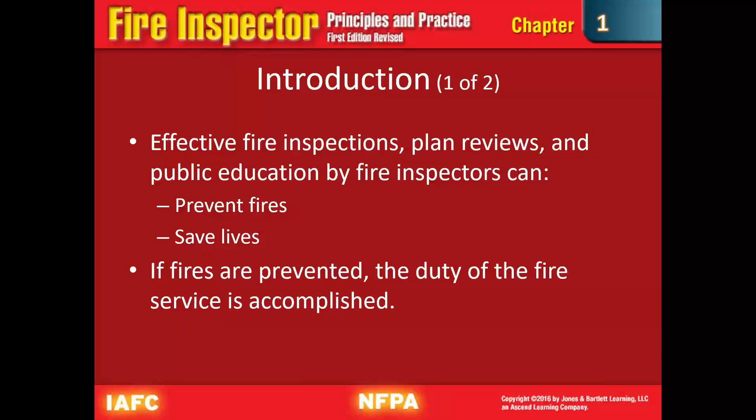It kind of goes back to an old adage from Ben Franklin that I always like to share with people, that an ounce of prevention is worth more than a pound of cure. So if we can prevent these fires from happening, we can prevent these bad things from going on, then we're not risking the lives of the citizens and the lives of our guys, and we can make everything a little bit safer for everybody, all the patrons of these different commercial businesses and all that.

The fire inspection unit may be part of a fire department or an independent unit. You'll have fire protection engineers that are typically the ones contracted to build a fire suppression system, or have some type of guidelines, or they may calculate fire flow and things like that for these different businesses, and help keep the underwriters happy.

You may have insurance inspectors that come out and inspect different buildings within your jurisdiction, and that's on the same lines, to keep their underwriters happy.

Now, I think most everybody here is part of either a fire department or governmental entity. It's like my position - I'm the fire marshal for Pearl River County, Mississippi, and my inspection authority goes through the building department, through the government agency itself. I'm not part of any fire department as part of my job, but that differs in different organizations and agencies.

It has the three E's of fire prevention: engineering, educating, and enforcing. So it's kind of working on what works, and we'll get into these different tests and programs that develop codes and standards to maintain that level of safety, educating the public - not only kids during fire prevention week, but you may take a few minutes to educate somebody as to why this is safe in their business. And also the enforcement aspect of it is when they don't...

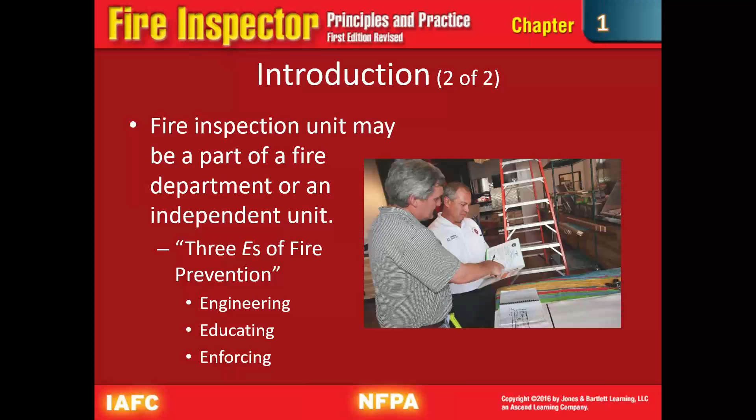So the question is, what is a fire inspection? It's a visual inspection of a building and its property.

We'll talk about a few other things like property maintenance that has a big influence on fire safety. We want to determine if a building complies with the statutes and regulations.

We want to reduce risks of fire and maintain its level of protection that's required for its occupancy.

Going back to that on the previous slide, believe me, there's a lot of companies and businesses and buildings that will, if you let them get away with things, they will. So that's why we're here, that's why we go out and inspect these properties.

Inspections are conducted at businesses, apartment buildings, schools, hospitals, places of public assembly, and other occupancies, except 1 and 2 family dwellings. A residential property that's a 1 or 2 family dwelling is typically not going to be regulated in most areas.

The plans for it may be reviewed, but typically we're not going to schedule regular inspections in those.

But going back to it, like schools, I know in Mississippi all of your daycares require annual inspections by the state.

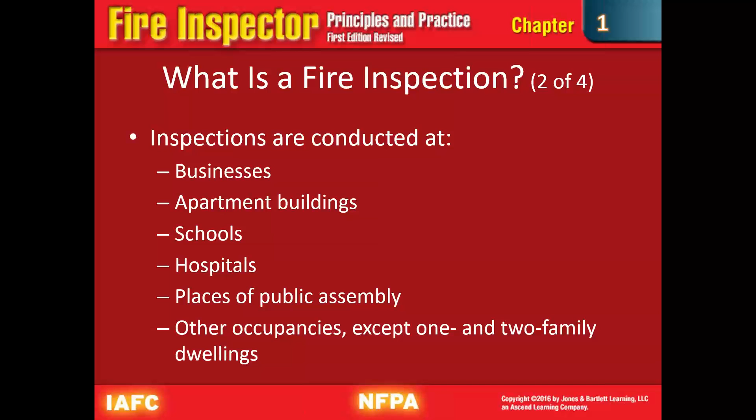Hospitals, 2 inspections a year, and those are your organizations that typically require state licensing. So those are pretty good about following directions on fire inspections and things like that.

During an inspection, we want to test the suppression and fire alarm detection system. Now, the way that we're going to check that, we may not necessarily go and conduct the test fully, but...

We're going to make sure that they are paying their independent inspector to come out and check the system. If it's like an Ansul system, they're going to check and make sure the propellant is proper.

And the extinguishing agent is proper and everything's charged, ready to go, and they'll tag it, and that's that form of inspecting it. Also with the fire alarm system, certain systems you can check to make sure they're operating properly.

Occupant evacuation drills, we're going to see a lot of that in schools.

A lot of other businesses may be required to have an evacuation drill posted, but it may be in the safety plan that is issued out to employees and things like that.

We want to evaluate the fire retardancy quality of a certain building. Kind of getting a little farther ahead, but you start dealing with buildings where you're doing a lot of giving.

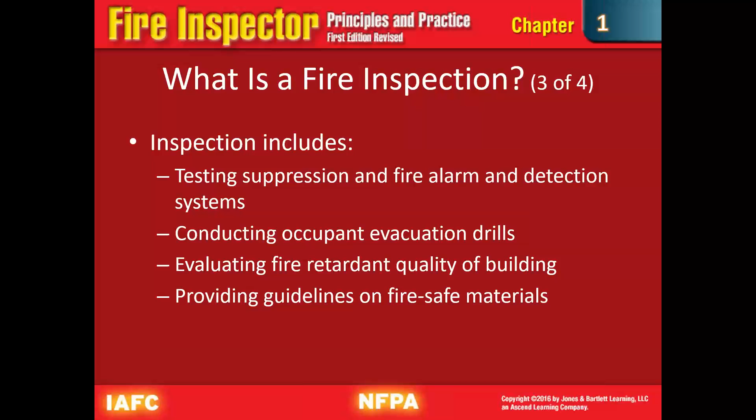Well, with that give us some take, and you may have to look at getting a variance passed for a certain building that you're really going to inspect, to look at where they're doing better on the safety side, to where you may be able to be a little bit lax on another aspect of it. And then providing guidelines on fire safe materials.

Now, your general fire safety or process inspections, we're going to look for any type of overcrowding, like in your assembly buildings, gyms, town halls, any type of event halls and stuff like that.

Blocked exits. A lot of times you may see in a mercantile business that they'll have stuff just stacked up, or...

We used to get complaints a lot from a local store that they would store things down the aisles, and the concern was that people weren't able to reach the exit, or they'd block a rear exit door.

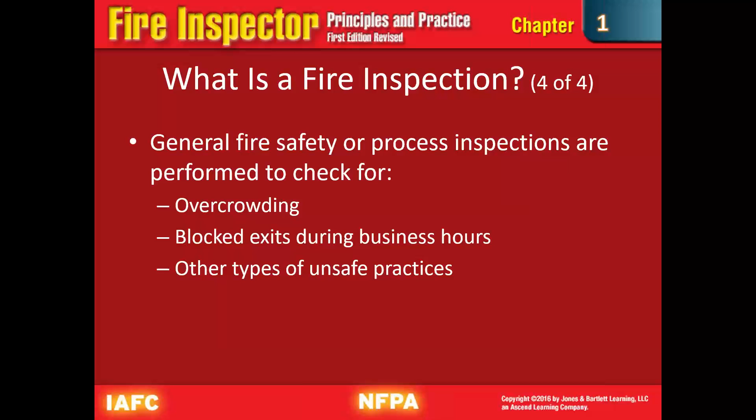There's also other types of unsafe practices that we may find while we're doing these inspections, and we can bring that to their attention.

Fire inspectors may work in the fire department, an independent code enforcement agency, or a business that performs fire inspections as a contracted service. I discussed a little bit about that earlier. Local government determines where and who performs the inspections.

And that's really important. We'll get more into the administrative and legal aspects of it. I believe there's actually a legal aspects chapter, and you definitely want that to be on the minutes of your entity's meetings, showing where you were hired and approved.

If you are the fire inspector or the fire marshal, that's part of your job title, so that whenever you're going and doing these inspections and this code enforcement kind of work, you're backed by your agency.

Fire inspectors that work within fire departments may assume other positions: fire marshal, fire investigator, fire and life safety education specialist, and fire protection engineer. Most places, especially here in the southeast region of the United States, we're going to see that one person is pretty much everything, and they do everything.

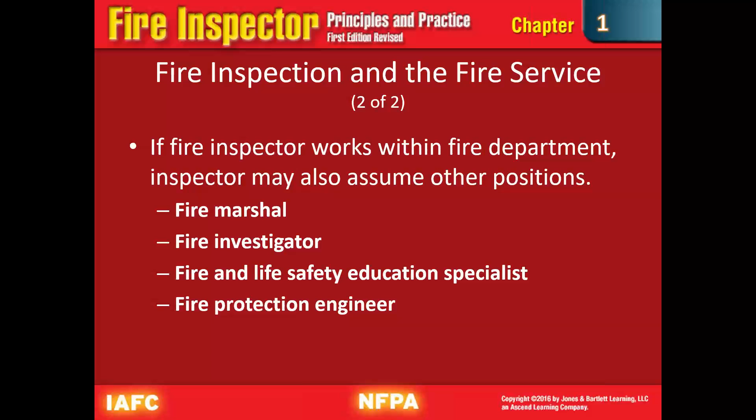Now, I've kind of gone over everything, and I don't agree with some of it, but it just is what it is. This is the information to know for the tests coming up.

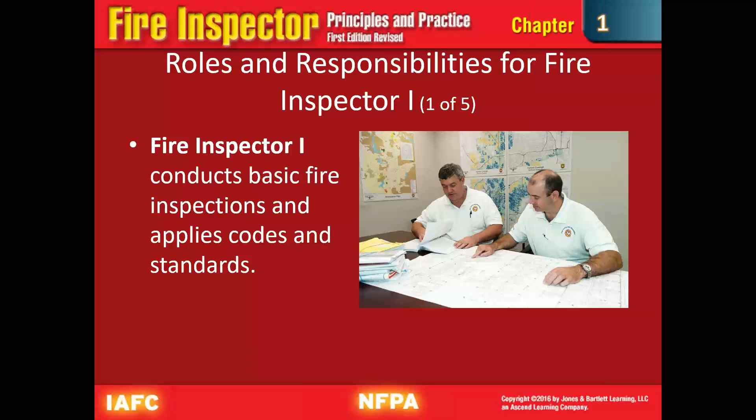All right, your roles and responsibilities for the fire inspector, and they're really breaking down the Inspector 1 and 2 aspects of it. The Inspector 1 is going to conduct your basic fire inspections and apply codes and standards, like a daycare inspection or a new commercial property inspection, something pretty simple.

The job performance requirements of an Inspector 1 are things we'll see again. I know they really harp on everybody knowing what your responsibilities and abilities are. But inspecting your structures and writing reports is very important. There's actually a whole chapter just on report writing, which we'll go over in the next few days.

Identify the need for a permit and how to obtain it. Recognize the need for a plan review. Investigate common complaints. Identify codes and standards being violated. And participate in legal proceedings.

That may not necessarily be court, depending on how your agency, department, and municipality or government agency is set up to run. Your board of supervisors, city council, city aldermanship, they may be the appeal process.

If somebody doesn't agree with part of the code that you've tried to help them with, you may have to go testify before your government board to justify what you found, how it violates the adopted ordinance or code, and what impacts that it plays. So that's a really important part.

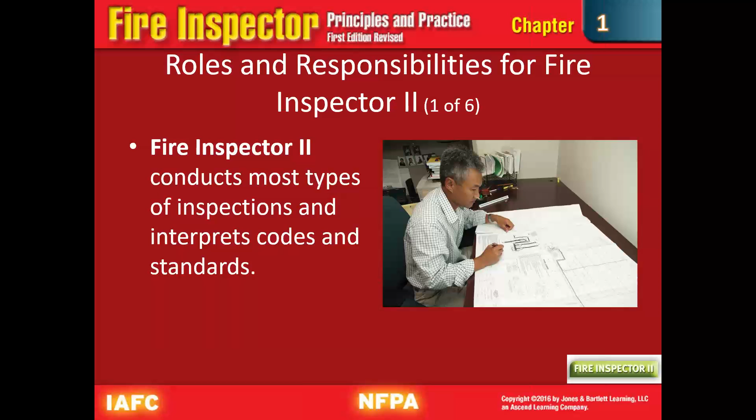They conduct most types of inspections and interpret codes and standards, and that's a big change to notice. Inspector 1 is going to follow the code, but Inspector 2 is going to interpret it - what is the intent of the code and how does it apply in this specific situation?

The job performance requirements for an Inspector 2 include processing permit applications, processing plan review applications, and investigating complex complaints.

I recommend modifications to codes and standards. Maybe something in the code is up for readoption or adopting a new code set, and you may not like what's in the code - it may not work for your specific area. That's where you can do your own research and figure out what's going to work for you.

We want to recommend policies and procedures for inspection services. If you see an unsafe practice, you can say, hey, why do you do it like this? I think it may be a little bit safer if you do it like that.

Also to compute the maximum allowable occupant load in a multi-use building. A few little differences can make a big difference as far as your occupancy load. This person is going to have a little bit more knowledge and ability to deal with figuring the occupancy for more complex problems, ones that have more variables.

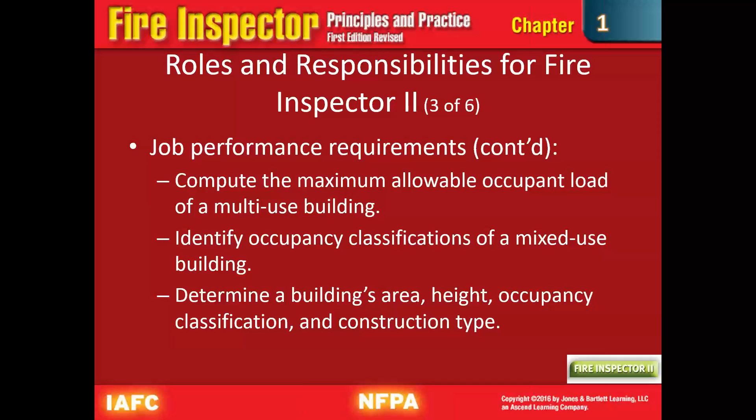Also to evaluate fire protection systems and equipment, analyze the elements of exits in a building, evaluate hazardous conditions, emergency planning procedures, and verify code compliance for hazardous materials and flammable and combustible liquids and gases. I think everybody has some form of LP gas or some type of hazardous operation or material that comes through their area, and it's really important to make sure these are being handled and stored properly.

We'll look at fire growth potential and inspect emergency access for the fire department. Again, it's kind of redundant from the Inspector 1 level, but it's also for all fire inspectors - make sure the fire department can get there and put in an effective attack.

Verify compliance with construction documents and ensure that life safety systems are installed, inspected, and tested. What does that mean with compliance with construction documents? Typically in a large scale commercial project, you're going to have the plans that have been reviewed, and then you'll have what was actually built. When they get into the process, they may find there's an issue where they're not able to comply or build it as it was engineered, and they may have some type of change on the fly and a different change order put in.

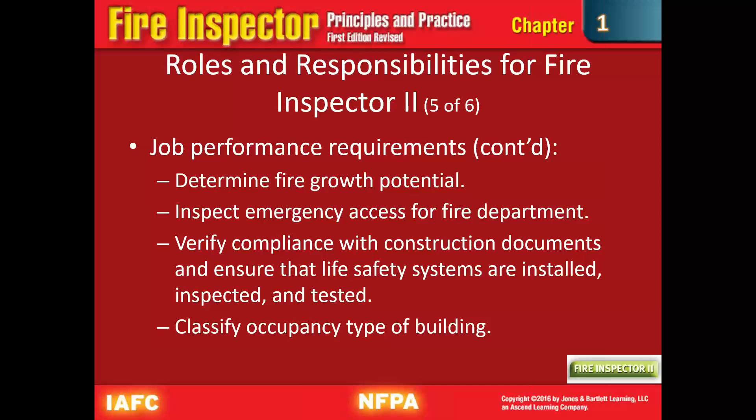Being able to compute the maximum allowable occupant load, again reviewing the proposed installation of fire protection systems - it's kind of calculating fire flow and things like that.

Verify the means of egress elements are provided and meet codes and standards - that's the size of the door, anything that prohibits the door from opening properly, so on and so forth, and we'll get into that for sure. Also verify the construction type of building based on the set of approved plans and specs, which we kind of already spoke on.

All right, so we're going to talk about codes and standards, and they provide us guidance for the construction and use of buildings. So our code is going to be a rule or law enforcing a fire protection, life safety, building construction, or property maintenance issue.

So our code is going to be what's adopted. In most places, whenever they adopt a code, it is law, it's an ordinance, and with that there's an enforcement ability with that code. A city may have a citation for a fire code violation that is just a violation of a city ordinance. You may have some states where there's actually a state statute regarding that, where a law enforcement officer with the ability to swear affidavits can either place a person under arrest or write a citation.

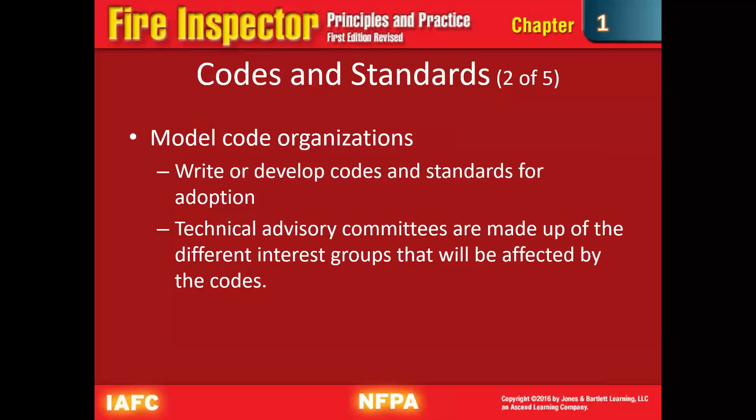You have your technical advisory committees made up of different interest groups affected by the codes - again, that's the same thing where you'll have your firefighters, construction workers, engineers, everybody at the table talking about their interests and what area they represent. The goal is to work together and come to something everybody can agree to. I've always said if you had a building built by a fire prevention guy or a fire inspector, it would cost too much and you couldn't live in it.

So we have to have that happy medium. All right, prescriptive code - we're going to list specific details an installation or construction must meet. The building code, and fire code and building code go hand in hand - you really have to be familiar with both. They do leave a little bit of gray area for inspectors to make little variances here and there, but for the most part they're going to be pretty strict on the type of material used and how it's put together.

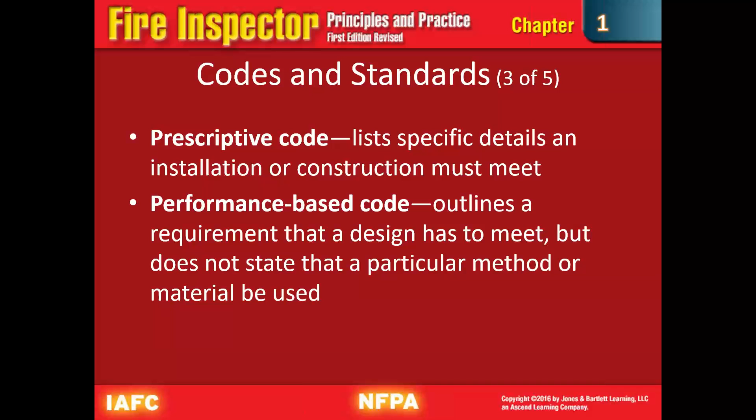Your performance-based codes outline the requirements a design has to meet, but typically don't list the particular method or material that has to be used. For example, take exit signs - if you look at earlier code sets, it gives you a certain lumen level, and says it has to be a certain type of bulb and battery backup and so on. As technology has developed, you may have some type of luminescent glow-in-the-dark option that gives off the same exact level of brightness, but it's not covered in the code book because it's not a lighted fixture with a bulb and battery backup, even though it probably performs better. That's where your performance-based code comes in - it doesn't matter what you do as long as it meets this level of safety, this level of performance, it's going to work.

All right, the adoption process.

All right, when a new code is created - say one of the things that we're working on, COVID's kind of knocked us back as far as in our area, is adopting a new code set. As things update - society, different changes in society, construction methods, environment, and stuff like that - we want those codes to reflect that.

So as codes are updated... we may find some things that work for us better, things that don't really work all that well. It kind of goes back to, would a construction feature for snow load really affect people in South Mississippi, South Louisiana? May not.

But the proposed language is prepared, and that's typically working with whatever legal counsel your agency uses to keep everybody happy. You may have a code specific to your area because of whatever issue has come up that required that - say your department has had an issue with building collapse, and they want to prevent that from ever happening again. All new construction needs to be built - instead of having 2x6 floor joists, we want to see 2x8s or whatever.

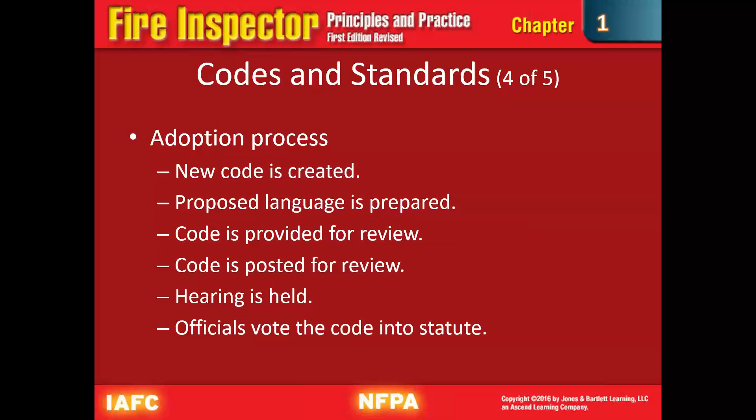Once everybody's happy, it kind of gets posted. Have public input - what does the public feel about this? It's going to make the construction of a house go up $800. People may lose their minds over that. So you never know. A public hearing is held where the actual government entity - your board of supervisors, your aldermen, your council - can hear concerns from the public, and then they vote to make the code an ordinance and put it enforceable.

All right, and we talked about that. The codes and standards are adopted under most of the state laws and local ordinances.

Now, understanding the legal processes - and I mentioned this a little bit before - the legal authority for the fire inspector varies by state and often within a state. The authority for my level of job here is completely different from maybe the level of authority of a fire department fire inspector or municipal inspector or something like that.

And it's also kind of according to the situation. Whenever I was working for the city of Poplarville, I'm also a certified police officer. I have the legal authority - I was commissioned by the city police department, and if I needed to write a citation, I could. But that authority, that line of authority, is already established.

And typically it's going to be included in the job description. It should be included in the job description, just so that you don't have somebody doing more than what's wanted.

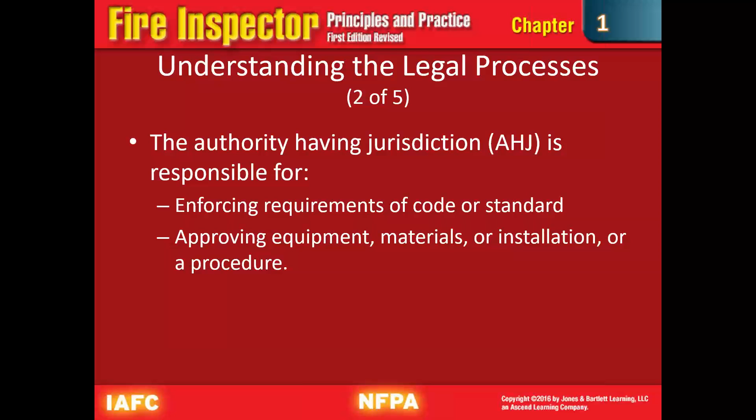The authority having jurisdiction is responsible for enforcement of the codes and standards and the enforcement requirements - approving equipment, materials, and installation or procedure. All right, and it's also in the very front of code books where it talks about the administrative section, the authority having jurisdiction, and whose responsibility it is. You get a chance to read into that, and that's something I believe would be an assignment to read over the administrative section.

All right, your state and local law affects every aspect of your job, and that is very, very true. You may have specific requirements that every written notice must follow. The range of authority is defined by your state and local law. It may cover your types of property, sizes, and the type of inspections that you're able to do.

For instance, in Mississippi - just for an example, something I get a phone call about all the time, drives me crazy sometimes - we're part of the Mississippi Insurance Wind Pool in South Mississippi. All mobile homes have to be inspected by the Mississippi State Fire Marshal's Office. Now, I am duly certified, appointed, and all this - fire marshal for the county - but I don't have that authority. I don't want that authority. Poor guys with the state, that's kind of something they got put into their area of operations.

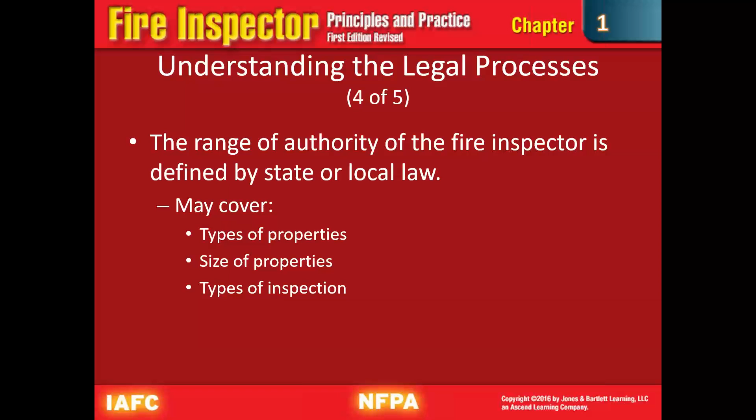But this is kind of an example because they needed somebody to inspect it and to ensure those properties - they have mobile home inspectors. And you may have something similar, but for different means. So be aware of that and where you fall in that. You may be involved in legal proceedings, criminal or civil, according to how your agency wants you to be involved.

You get into court, any decent defense attorney is going to attack your training, your expertise, your procedures, your guidelines, everything, and certifications. So your documentation of your training and of your credentials is going to be important, and then your policies and whether you're following those policies, documenting everything really comes into play and really helps out.

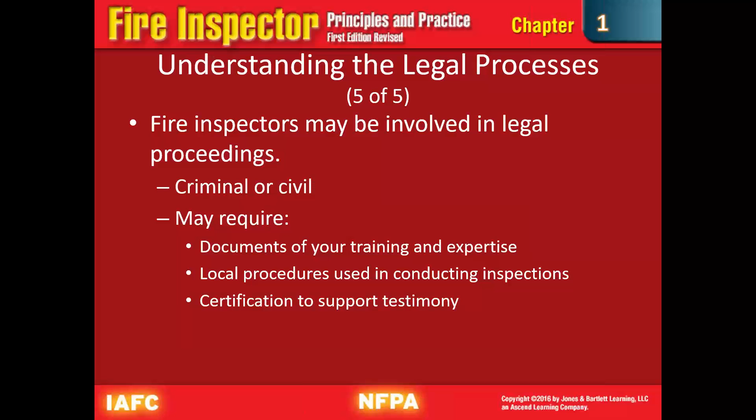A permit is a document stating compliance with or restrictions for the use based upon the applicable codes. Some places are different - you hear either a CO or a certificate of occupancy, another term for your use and occupancy permit. You may have a special use permit for an event, and that event could be held either in a public place, or you may have a certain type of event where areas are cordoned off and things like that.

Your fire protection equipment permit - say your sprinkler, or maybe you have a warehouse, like some type of commercial warehouse where they use a deluge system, you may have to have a special permit for that, for the amount of water and runoff and so on and so forth. Hazardous materials use permit, like LP gas places, any other type of material processing plants, so on and so forth.

Just a few examples. You may also have hot work permits if you have a manufacturing facility, and your agency can require a permit or a hot work permit to be pulled whenever there's any type of welding or cutting on metal or something that has a higher than average percentage of having a fire hazard develop from it.

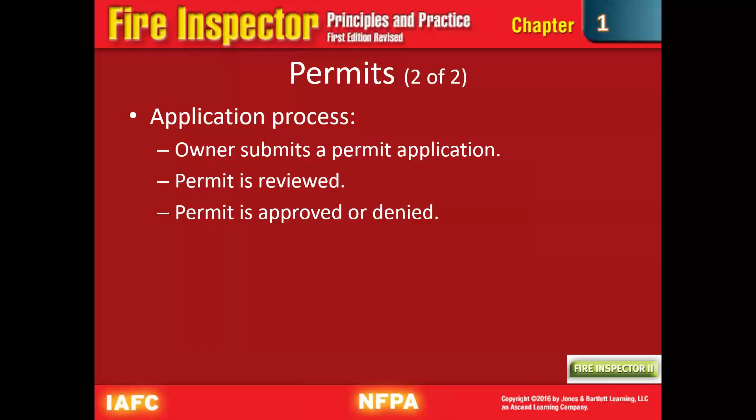All right, ethics and the fire inspector - this is one that's really big. Hold on guys, we're getting to the end of it, so just bear with me. The fire inspector must not be influenced by business or political interests. And there's the fine line - my little soapbox.

It's hard to be an inspector and not have that in mind, especially those who work in municipalities where you may have a friend of the mayor wanting to do this or wanting to do that. I'm not saying to be pressured - definitely don't be pressured, and don't be influenced or coerced or forced into something. If it's something that you absolutely feel is not safe, stick to your guns.

I've known some of my friends in fire prevention that were expected to sign off on something that was not safe, and they told the mayor or the alderman or the councilor or whoever the governing body was, okay, well you sign it, you sign off on it, and if something happens, you're responsible for it. But that's one of the things you're going to deal with.

If you get in, especially if you are the fire inspector or the fire code official for a jurisdiction, you're going to deal with these places that are wanting to put in a multi-million-dollar facility in your area and tell you, well, if you don't agree with this, then we're just going to go down the road. Most of the time, no, that's not the case. But it's also part of your job to find if a variance - and that's a big if - a proper variance can be made if there's a certain issue, that's something you can work with.

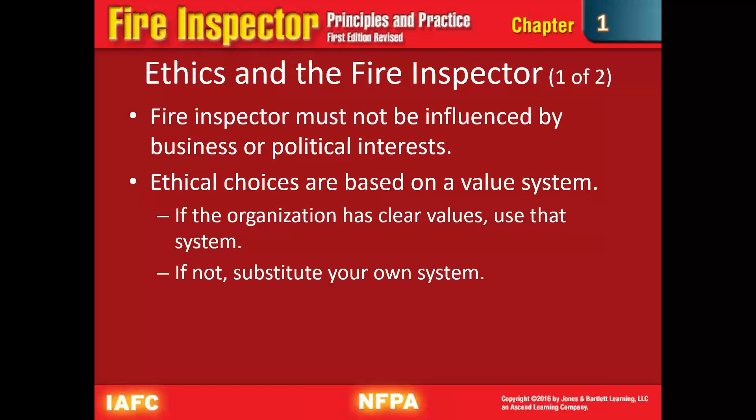It says in the administrative section of the code book in the IFC that you're not held liable, paraphrasing here, as long as you're acting in good faith. Well, you can still be held liable. Civil liability is something that doesn't stop. But if it doesn't look right, doesn't feel right, you either work to find a variance or deny it and do what you got to do.

Clear organizational values can stem from having a code of ethics that's well known. You may have to, especially if you're taking over in an area—and I've heard of this happening—deal with a previous inspector who did fire inspections from the driver's seat of their car. There's no way you can do that. But if you go in there and say, no, this is the right way, this is the way it's going to be done, they're going to know: don't mess with this guy, don't try to play games with him because he's serious, or she. Selecting employees that share those values is especially important if you're in charge of a fire prevention division or bureau. You want to make sure that anybody you bring in shares those same values and is going to do the right thing.

Ensuring that management exhibits ethical behavior—that's the thing. If you're the guy in charge, you need to be the one showing everybody else how to be. Have clear job goals, don't try to obscure them. Have performance appraisals, that's where you get assessed and also assess your people to make sure everybody's doing their job properly. And then implement an ethics training program. Sometimes we need to be reminded. Some people may not see it as you see it—you may see a big ethical issue whereas others necessarily may not.

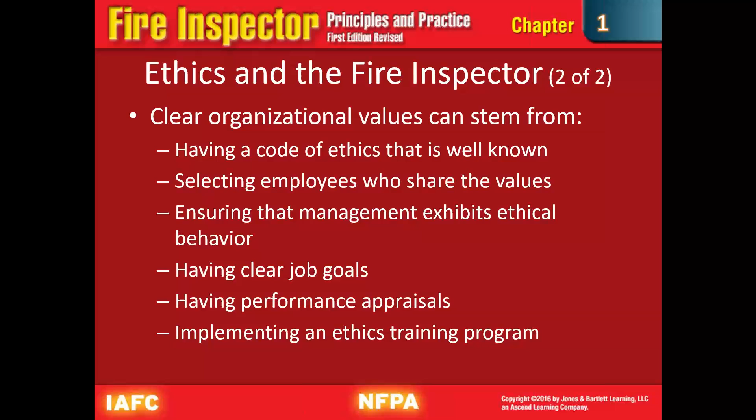In part of your career, you should always develop these skills. If you put down fire inspector and don't do anything with it, don't look into books, don't keep up with different changes, it's going to leave you. So you want to continually develop your professional skills and knowledge. Go to conferences, go read up. The IFC has different books that talk about how codes have changed over the years. They have a little supplemental information that's really important, and it's good to have that knowledge, especially if you're going to be working on creating new codes and adopting codes for your area. Then also professional organizations and state agencies offer continuing education and professional credentialing. I know Mississippi has an association of fire inspectors, and there are international groups and stuff like that too that offer those.

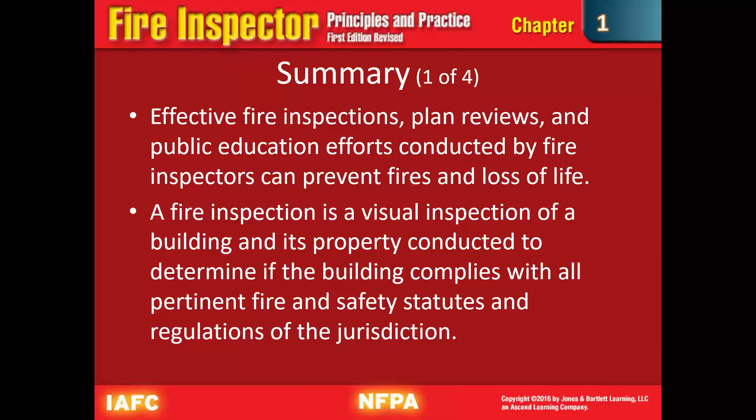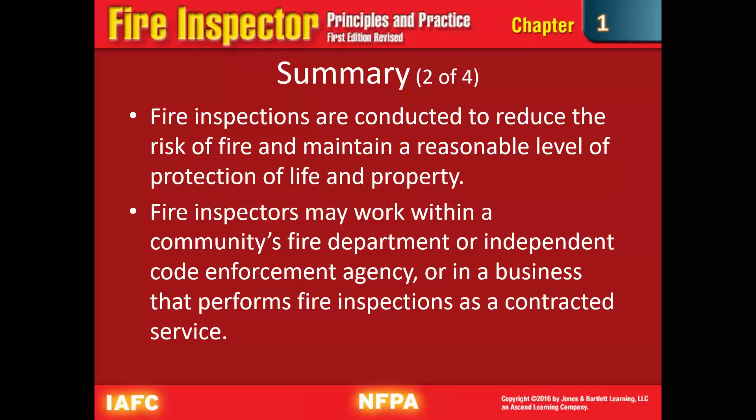So in summary, real quick: effective fire inspections, plan reviews, and public education efforts conducted by fire inspectors can prevent fires and loss of life, and save property. A fire inspection is a visual inspection of a building and its property conducted to determine if the building complies with all pertinent fire and safety statutes and regulations of the jurisdiction. They're conducted to reduce the risk of fire and maintain a reasonable level of protection of life and property. Fire inspectors will work within a community's fire department or an independent fire code enforcement agency or business that performs fire inspections as a contracted service. Codes and standards are regulatory or industry adopted documents that provide guidance for the safe construction and use of buildings. A code is a rule or law established for the enforcement of fire protection, life safety, building construction, or property maintenance issues. A standard is a set of specs or requirements considered industry best practice that meets a minimum level of performance guidelines. The job description of the fire inspector should list the limits of legal authority and how to gain the next level of expertise. Many fire inspection activities result in the issuance of permits—you need to know how all that works.

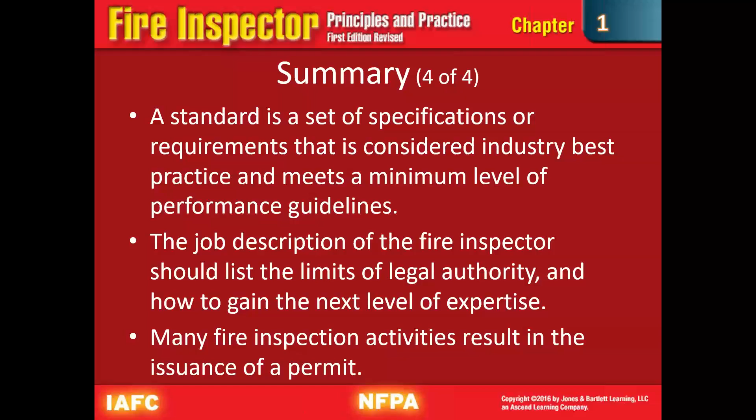So that's it for chapter 1. Remember to read the chapter. All right, we're going to get into chapter 2.

No, we're not. Go away. Let me see, I believe it is chapter 4. There we go.

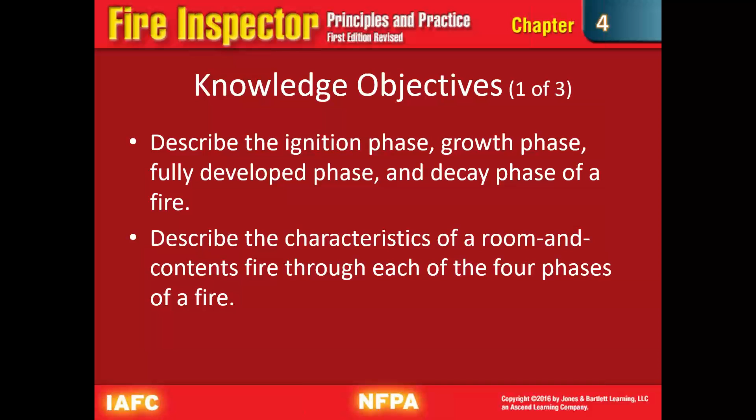We're going to describe the ignition phase, growth phase, fully developed phase, and decay phase of fire, and the characteristics of a room and contents fire through each of the four phases. We'll describe how interior finishes and decorative materials and furnishings may affect fire growth, how building construction elements may affect fire growth, and how to obtain the flame spread and smoke development rating for the contents of an occupancy.

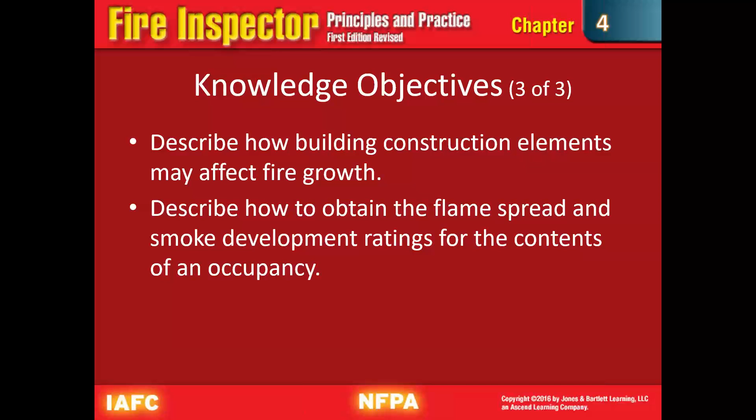One of the things I recommend is everybody look up the Underwriters Laboratories test on YouTube. It's a test of modern materials versus older materials, like natural woods, cottons, and linens. They start a fire in a room filled with older contents made of natural materials, versus newer contents with plastics and foams, and it's mind blowing. If you haven't watched it, I encourage you to, because it shows how fires spread so much quicker now, since pretty much everything in our homes is plastic, petroleum-based stuff.

So we know that a fire inspector ensures code compliance, analyzes situations, identifies adverse situations, and acts accordingly. All right, chemistry of fire.

This is kind of 1001 all over again, but we need to know these things to know how these codes are going to affect buildings. One of the very important things I've learned is that the definition of fire is very important. We talked about different legal proceedings, and you may have to stand on the stand in a courtroom and tell a jury what fire is.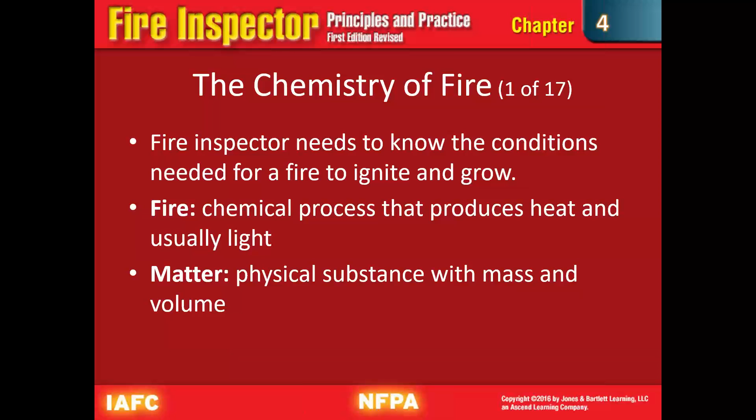Fire is the chemical process that produces heat and usually light. There's another definition that says the byproducts are smoke, heat, and light. It's really important to know that, especially when working in fire inspection or investigations, where you're really having to prove your observations.

Matter is a physical substance with mass and volume. We have our states of matter: solids that have a defined shape, liquids that assume the shape of the container and are fluid, and gases that tend to expand indefinitely.

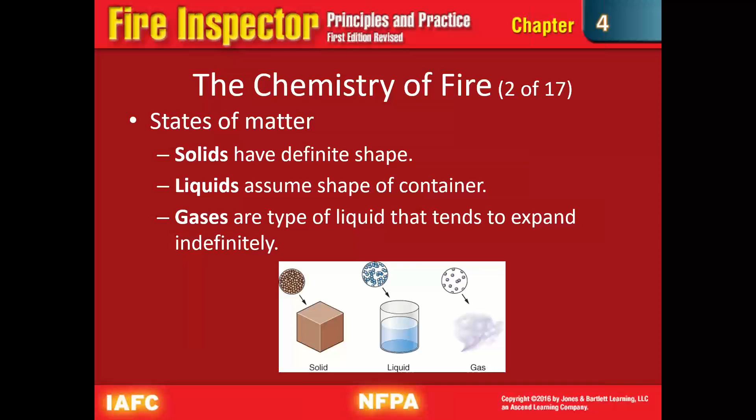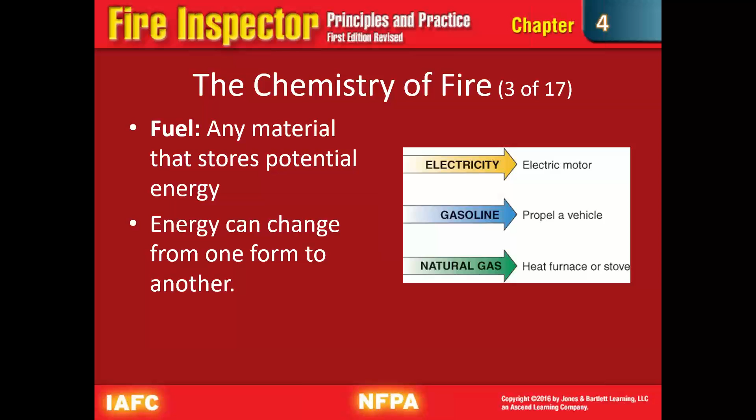You have chemical energy that's either an exothermic or endothermic reaction - exo being outside, it releases; endo being internal heat. Mechanical energy is typically friction, where it rubs together to produce heat. Electrical energy, light being thermal radiation. Nuclear, whether controlled or uncontrolled - fission, fusion, all that good fun stuff.

The conservation of energy - it cannot be created or destroyed.

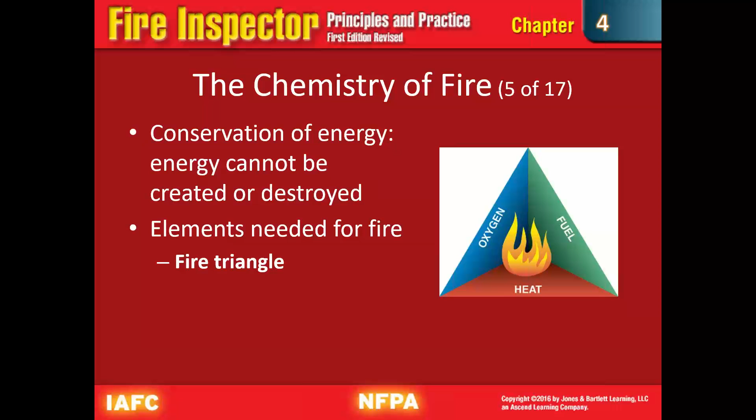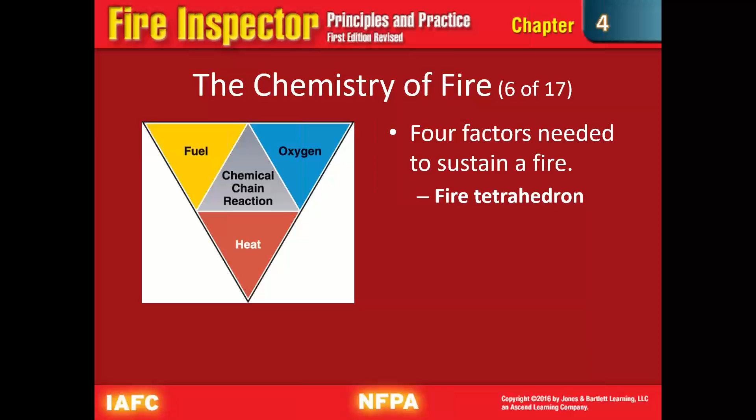Talking about the elements needed for the fire triangle - oxygen, fuel, and heat - we know that's been replaced with the fire tetrahedron. They found that you can have fuel, oxygen, and heat all together, but you have to have that chemical chain reaction to start and maintain the fire.

All right, incomplete combustion creates smoke. Guys, you have to bear with me, it's been a long day today, so we're going to get through this, and I'm trying not to mess up as much as I can.

Smoke includes the particles, vapors, and gases from incomplete combustion. They're lifted in the thermal column - remember, hot things rise, so smoke is a hot gas byproduct of fire, so it's going to rise. Partially burned particles become part of smoke, and completely burned particles become ash.

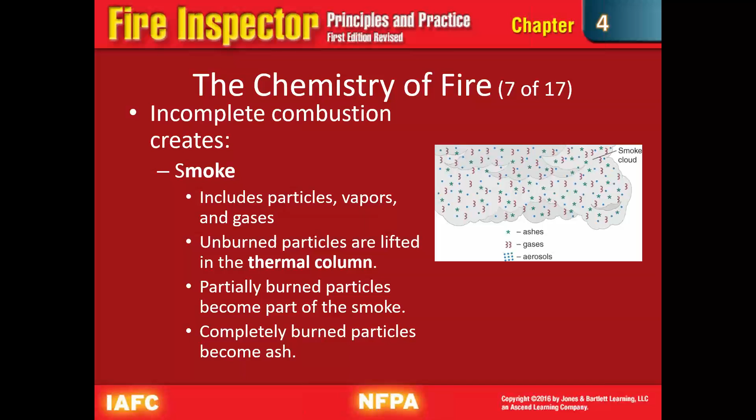From incomplete combustion we have different toxic gases - you have carbon monoxide, very important. That's becoming more and more of a thing, and a little tidbit is that carbon monoxide detectors, which were not part of the fire code, are now introduced into the fire code in certain situations, mostly residential occupancies, and specifically in dorm rooms.

Carbon dioxide's used a lot. Every fast food place, and well, pretty much every food restaurant, has a supply of it for the drinks.

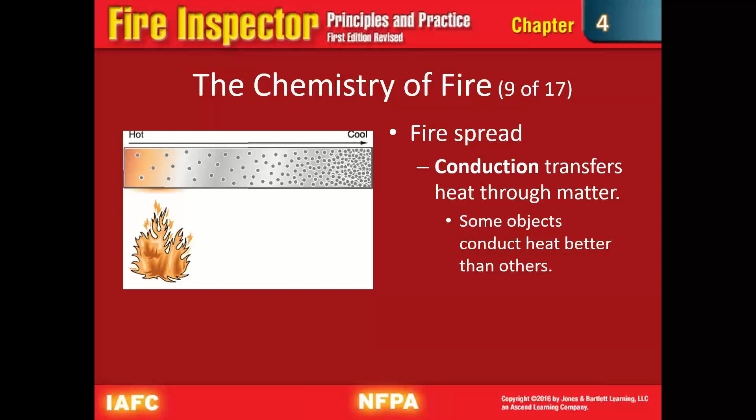All right, your heat. We know heat is hot. All right, the fire spread. You have conduction, that's transferred heat through matter. Some objects conduct heat better than others. You have metal, we know metal conducts heat very well.

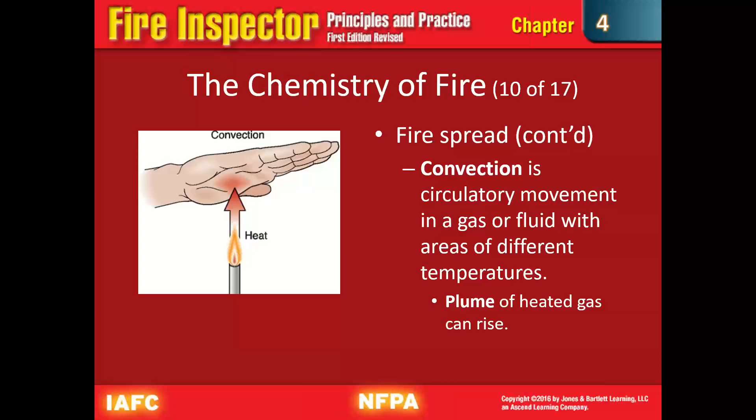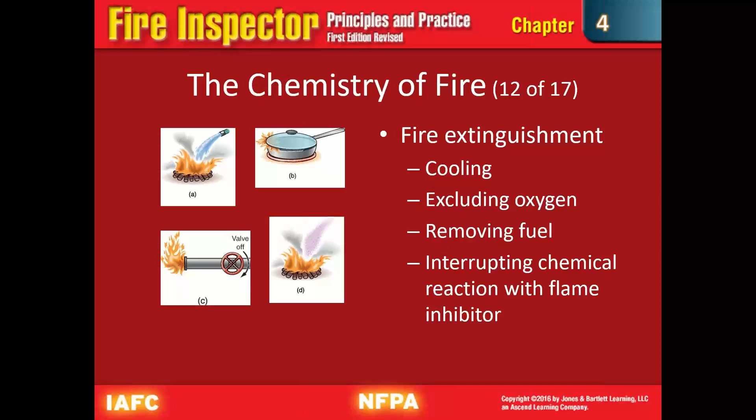So as firefighters, we know that we're going to fight fire and extinguish it by a few different methods. We can cool the fire, bringing the material below its ignition point, taking away that part of the fire tetrahedron, and it goes out. We can exclude oxygen, taking away that part, it goes out. Removing fuel, same thing. We're interrupting the chemical reaction with a flame inhibitor, which would be a kind of expensive way of putting out a fire or a campfire.

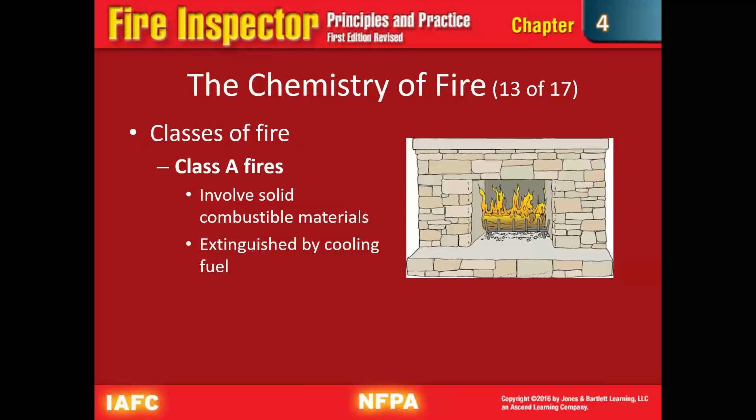All right, going over the different classes. Class A involves solid combustible materials, and we cool that down below its ignition point. Also, Class A fires, anything that leaves an ash.

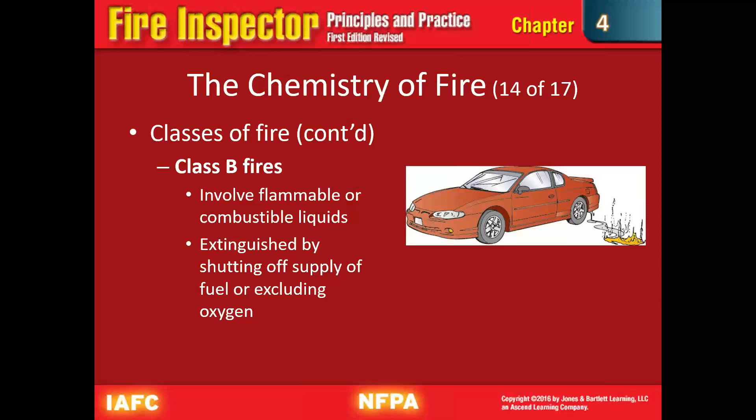All right, Class B is the flammable liquids. We can put these fires out by shutting off the supply of fuel or excluding oxygen. Also, things that come in barrels, like gasoline, oil, things of that nature.

Class C is energized electrical equipment. Once the power is cut, we can use a Class A or B fire extinguishing agent to extinguish that fire. Remember that Class C is anything that carries a circuit.

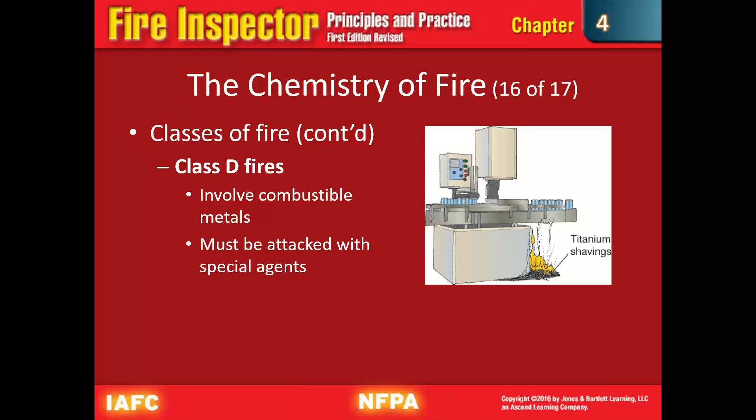Another method is passive cooling, and that way you kind of shower lightly in a mist of water onto it to passively cool the object. Now, of course, if it's a large piece of flammable metal and you put water on it, it's going to throw all kinds of sparks and become a hazard. But we can passively cool those and put them out.

Class K fires, this is something that we as inspectors are going to deal with. You will know about a commercial kitchen from the tile down to the ceiling. You will deal with this so much.

Class K extinguishers are required to put out deep fat fryers, any fires with the deep fat fryers that you see virtually everywhere, especially in southern cooking. We know that we need to have those in place, and those also are going to supplement your hood systems and your extinguishing Ansul systems and stuff like that.

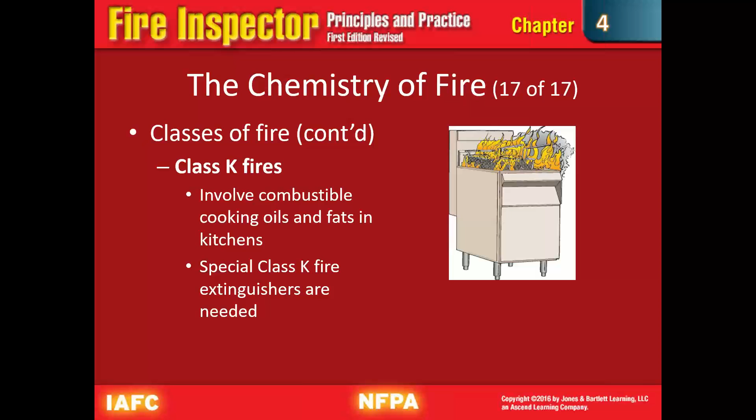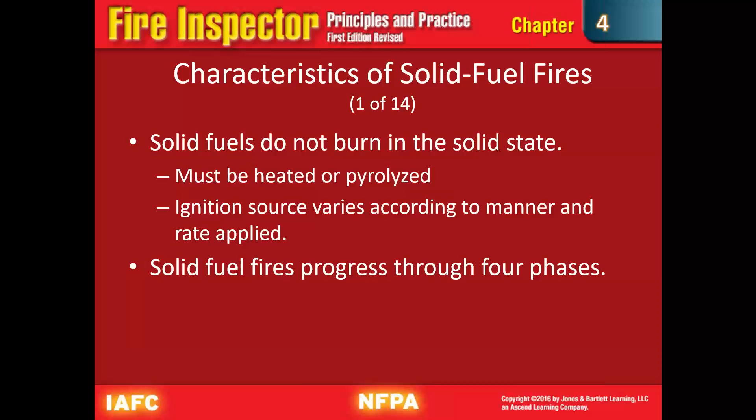Now, the solid fuel fires progress through 4 phases. All right, so we have the ignition phase, and that's typically where it's limited to your point of origin. Your growth phase, where it spreads to nearby fuel.

All right, so as the fire heats up, or as it grows and intensifies, it heats up all the surrounding materials to the point where they pyrolyze and start releasing their flammable gases until they ignite, and that further intensifies the fire and causes it to spread. Other factors like wind and ventilation play in, but we're just talking about the basics right now. The fully developed phase produces the maximum rate of burning, and that's where it's going to ignite all the available fuel.

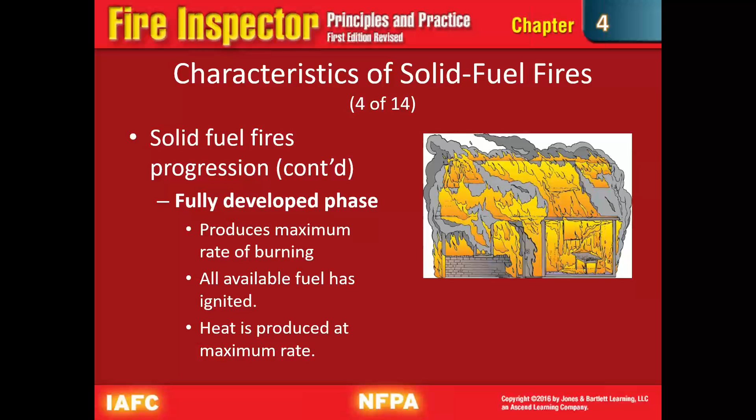The maximum heat is produced at a maximum rate. So, kind of the old timers say she's blowing and going, that's pretty much it. The decay phase is where fire runs out of fuel. The thermal radiation and hot gases decrease because there is nothing left there to burn. All your flammability is out of it. It becomes smoldering embers and then goes out.

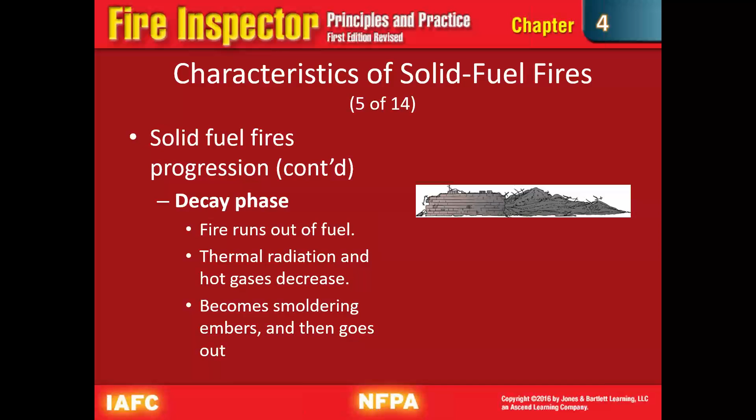There's an old time firefighter that says all fires go out eventually, one way or the other, whether the fire department goes and puts it out or not. But anyway, that's the decay phase.

So we know the principles we need to be aware of and keep in mind: hot gases and flames tend to rise. Convection is the primary factor in spreading fires upward. Downward spread occurs mainly from radiation and falling chunks of flammable material, where you'll have some drop down of material.

Then once all the fuel load is burned, it goes out because it's missing that part in the tetrahedron, and it can't continue on without something to fuel the fire.

Variations in direction of upward spread occur if air currents deflect flame. What we talked about, ventilation. It has to breathe and it has to exhaust.

Keeping that in mind, in certain construction types and construction features, it may be there to control ventilation and control flame spread. And I think we talk a lot about that in building construction.

The total material burn reflects intensity and duration of heat. All right, so it says total material, but I always would like to add the type of material. Like I mentioned before, you may have some type of petroleum-based product, plastic, foam, something like that, that's going to intensify that fire. That's going to accelerate the chemical reaction and the intensity, and make it burn hotter and faster and more quickly to ignite the rest of the ignitable material.

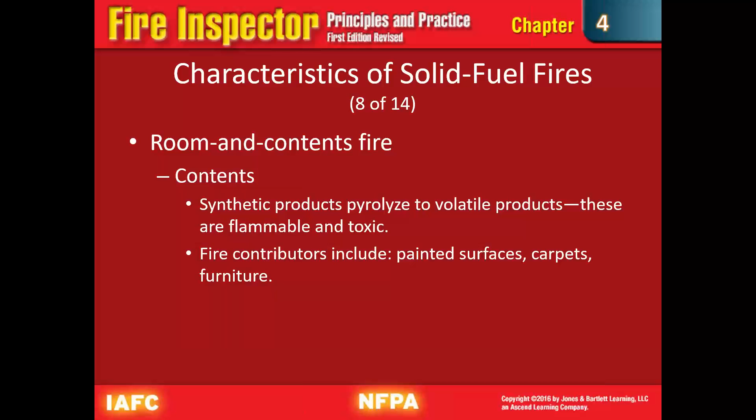An example of a room and contents fire in the ignition phase. This example shows a fallen candle ignites contents in a plastic wastebasket. Was very specific on the plastic wastebasket, but again, remember synthetic materials are going to have more of an intense fire. And the growth phase is where that additional fuel is drawn to the fire.

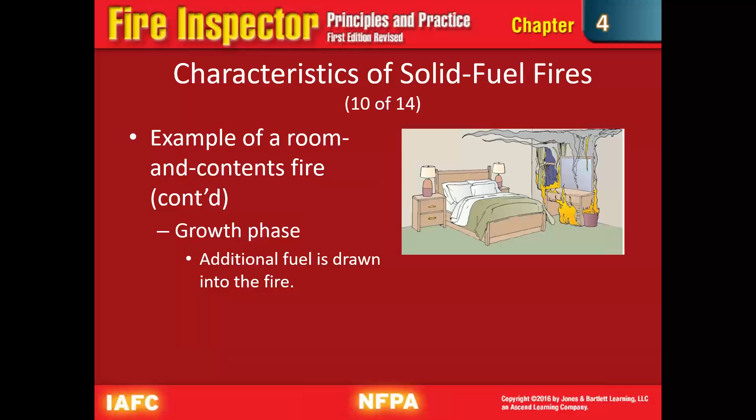I keep harping on the synthetic materials, but think about that whenever you're inspecting a building, say a mercantile or a little business that has all kinds of retail merchandise in there, and it's all plastic stuff from China. So it may be more prudent to have a higher level of fire protection in that property. But anyway, it heats the nearby material and spreads the fire.

Your fully developed phase, where at this point the heat has gone up over, it's ignited the bed and all the other areas around it, and temperatures increase to the point where the flammable materials undergo pyrolysis, and then that's the point where flashover can occur.

Now what's flashover? Anybody? Guy in the first row? All right. Flashover is where everything in the room all ignites at the same time. I know that's not the proper basic class response, but we're going to remember that's really dangerous. So I make that point again: in the fire loads you may find in these places, you're thinking of how quick are we going to go from the fire starting to flashover.

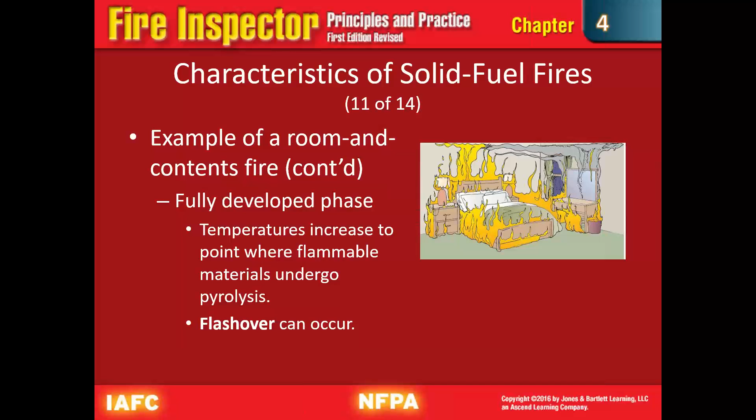Keeping that in mind, is this a significant threat to the occupancy you're inspecting, and are you making sure the proper fire protection procedures are in place? I keep thinking about our convalescent homes - they like to store up things or have excess decorations. Keeping in mind the situation, the occupancy and the residents, you may have to change that a little bit and go for a safer approach given the circumstances.

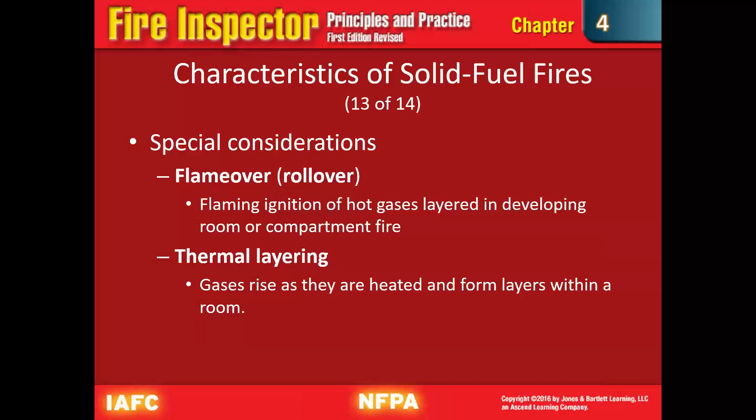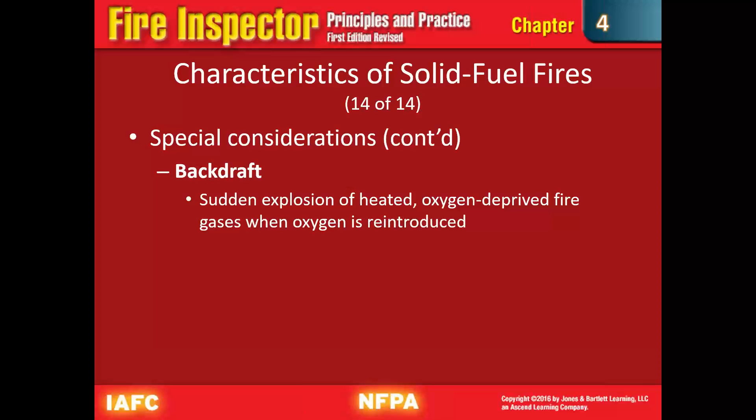Also, some special considerations: flameover, the ignition of hot gases layered in developing room and content compartment fires. Your thermal layering - gas rises with heat and forms layers within the room. Then backdraft, the sudden explosion of heated, oxygen-deprived fire gases when oxygen is reintroduced. Being aware of that definitely helps with different types of considerations for fire.

All right, the characteristics of a liquid-fueled fire is that it has to be converted to a vapor. It has to mix with air within a certain threshold to be able to ignite. The amount of liquid vaporized is related to the volatility of the liquid.

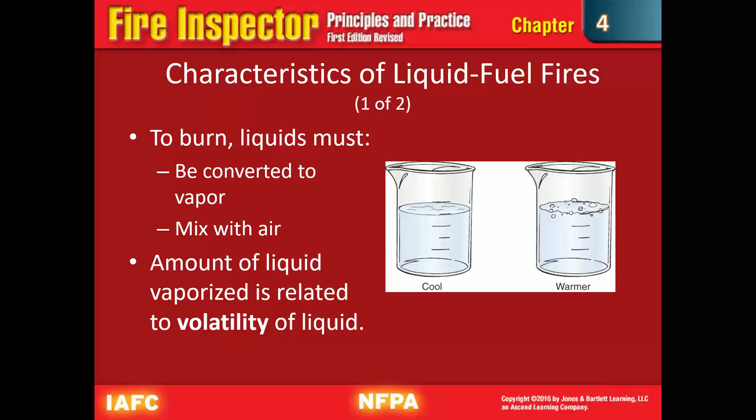So keeping that in mind, especially if you're dealing with a processing company that uses different chemicals in their processing - their flash point is the lowest temperature at which the liquid produces its flammable vapor. Your flame point, or fire point, is the lowest temperature at which the liquid produces enough vapor to sustain continuous fire.

An example of this is diesel. Imagine you have a pot, you put diesel in it, and put that on a burner. At room temperature, you can put a cigarette lighter to it and it's not going to ignite. But if you start turning on that hot plate underneath it and it starts heating up to where it starts releasing its vapor, you'll reach that flash point where you'll have little flutters and flashes. If the temperature continues to rise in the liquid, it will reach that fire point where it produces enough vapor to sustain the fire.

All right, your vapor density is the weight of the gas compared to air - is it lighter or heavier? Your flammable limits, or explosive limits, are the highest and lowest concentrations for a particular gas-and-air ratio to be ignited - your lower explosive limit and your upper explosive limit.

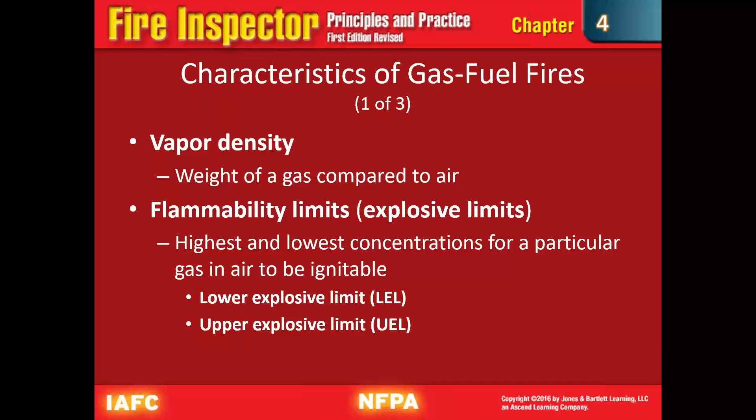Principal sources of ignition of flammable liquids include open flames, sparks, and hot surfaces. Typically your hot surfaces have to come in contact - it has to be more of a direct contact - but you may get a vapor close to a flame or a spark to easily ignite.

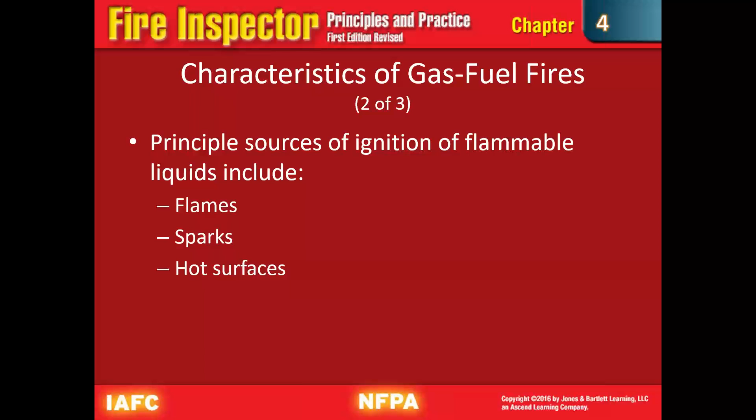And a point on hot surfaces - say you have a motorcycle, use that as an example, and you're out riding it on a long ride and some fuel splashes out of the tank, or out of a hose, or out of the carburetor, and it splashes down on the exhaust pipes, giving direct contact. It vaporizes very quickly from being heated up by the exhaust pipes, and bam, there you go. I see that in vehicle fires as well, especially with older carbureted vehicles.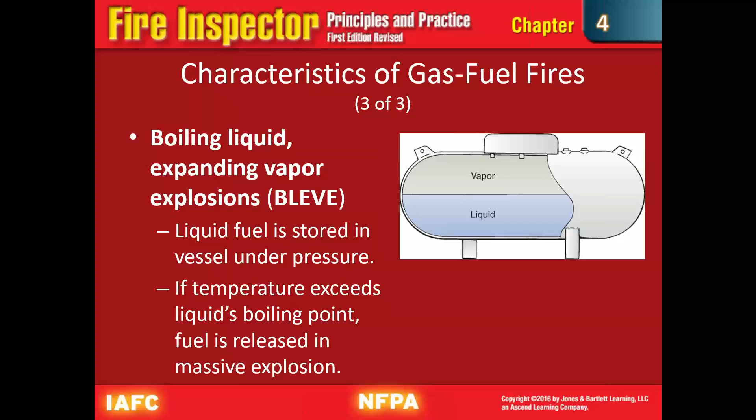Now we're going to talk about BLEVE - very important that everybody reviews this. It's the Boiling Liquid Expanding Vapor Explosion. It's where, when stored in a vessel under pressure, if the temperature exceeds the liquid's boiling point, that fuel is going to expand to the point where it ruptures its container and releases.

Fire growth is greatly influenced by building construction, referencing the Cocoanut Grove nightclub fire in Boston in 1942. That's something I'm going to try to do - reference some different case studies of where, if a modern fire inspector would have looked through there, how many lives could have been saved. But we'll talk about those later.

The fire growth can be caused by the building and its contents. It may be hidden or exposed - you may have hidden areas and void spaces in the building, especially if it's an older building that's been remodeled over the years.

Fire can also result from the furnishings, the interior finish, and the building construction elements. You may have combustible fiberboard that is part of whenever a building was first built, and they just kind of put a covering over it.

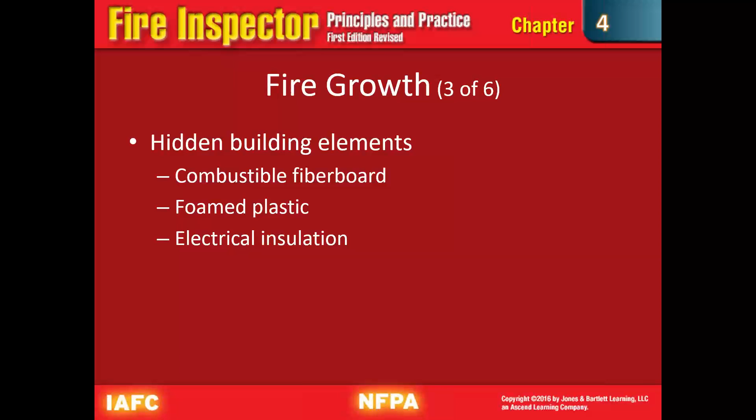Your interior finishings increase fire extension by surface flame spread, can generate smoke and toxic gases, and add fuel to the fire, as your heavy shellacs and heavy polyurethanes can also do. I know this was a concern at a certain aesthetic time period where people wanted to put carpet on the walls, and there are some types of carpeting made for wall coverings, but especially new carpets may have a certain fire resistance when laid flat, but once you put it up on a wall, it can actually be a fire hazard. Your interior finish, with those few examples, can generate more smoke and toxic gases and add fuel to the fire.

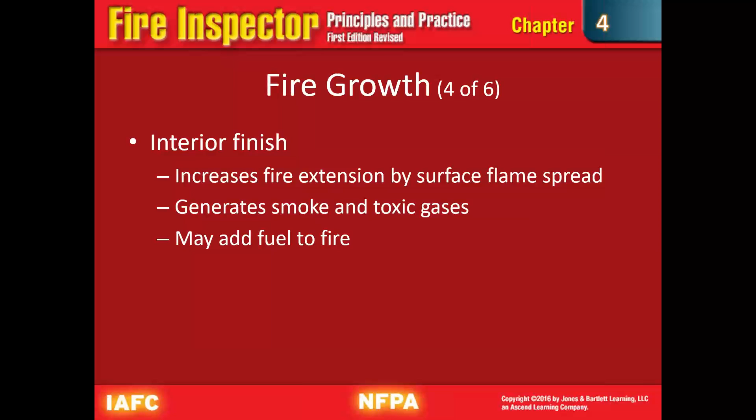Furnishings, drapes, curtains, decorations, chairs, couches, bedding, and so on, definitely can promote fire growth in a compartment fire. The potential is directly related to the construction materials. So you have things like drapes, curtains, and mini blinds, something like soft plastic that easily melts, and in a hot enough fire it easily ignites and can help with fire spread, especially if it's a low starting fire. It can run up drapes or curtains pretty easily.

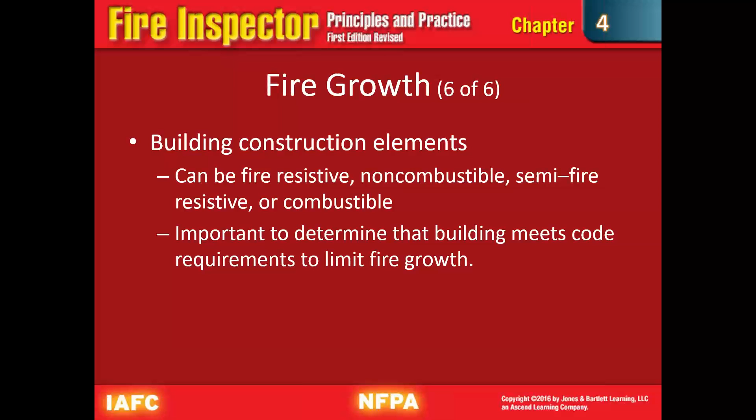Building construction elements can be fire resistive according to the occupancy and the type of building: non-combustible, semi-fire resistive, or combustible construction. You'll see your non-combustible, semi-fire resistive, and fire resistive types more in commercial buildings, and in separations between apartment buildings and things like that. But your combustible construction is going to be your stick frame houses and things like that. It's important to determine that buildings meet codes and requirements to limit that fire growth.

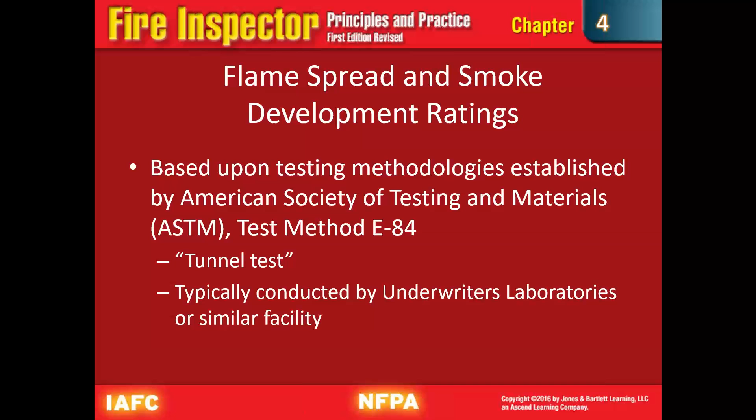Your flame spread and smoke development ratings, I kind of got ahead of myself and talked a little bit about it. This is one of those standardized testings, the American Society of Testing and Materials. We're talking about test method E-84 being a tunnel test, and it's typically conducted and they list Underwriters Laboratories, but there are several other third-party independent testing laboratories that conduct different testing on materials and practices.

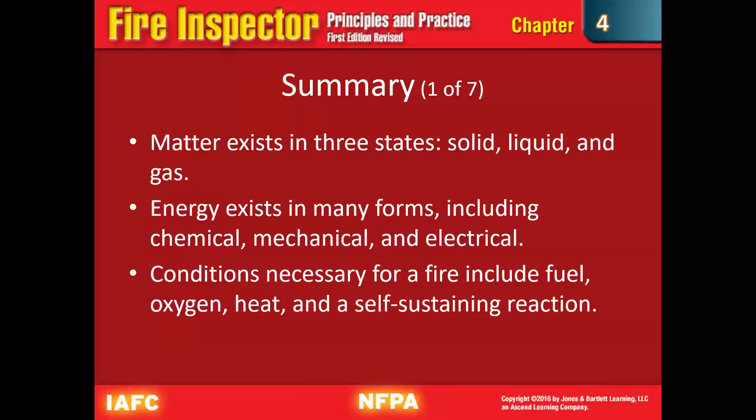In review, we know that matter exists in three states: solid, liquid, and gas. Energy exists in many forms, including chemical, mechanical, and electrical. Conditions necessary for a fire include fuel, oxygen, heat, and a self-sustaining chemical reaction to support ignition. Fire spreads by conduction, convection, and radiation. The four principal methods of fire extinguishment are cooling the fire, excluding oxygen, removing the fuel, and interrupting the chemical reaction.

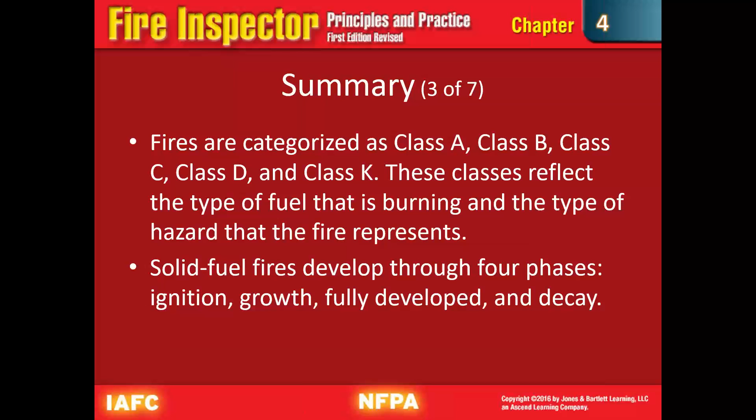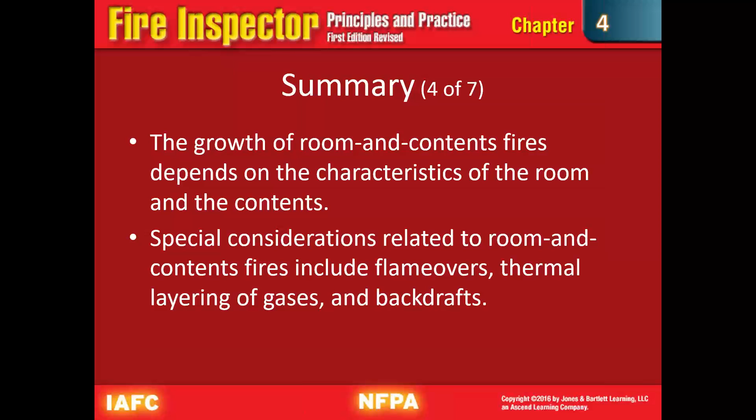Fires are categorized as Class A, B, C, D, and K, reflecting the type of fuel burning and the type of hazards the fire represents. Solid fuel fires develop through four phases: the ignition phase, growth phase, fully developed phase, and decay. Growth of a room and contents fire depends on the characteristics of the room and the contents. Keep that in mind. Special considerations related to room and contents fire include flameovers, thermal layering of gases, and backdrafts.

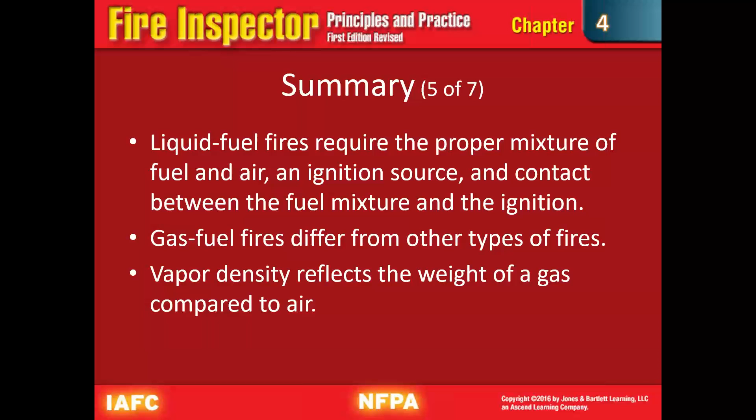Liquid fuel fires require the proper mixture of fuel and air, an ignition source, and contact between the fuel mixture and the ignition. Gas fuel fires differ from other types of fires and tend to be more volatile. Vapor density reflects the weight of the gas compared to air, so remember, lighter than air and heavier than air. The flammability limits vary widely between different fuels.

We're familiar with the BLEVEs, and they're bad. Don't want to be around them.

Fire growth and spread are greatly influenced by building construction. For example, whether or not a compartment goes into flashover is greatly influenced by the materials lining the walls and ceilings of the space.